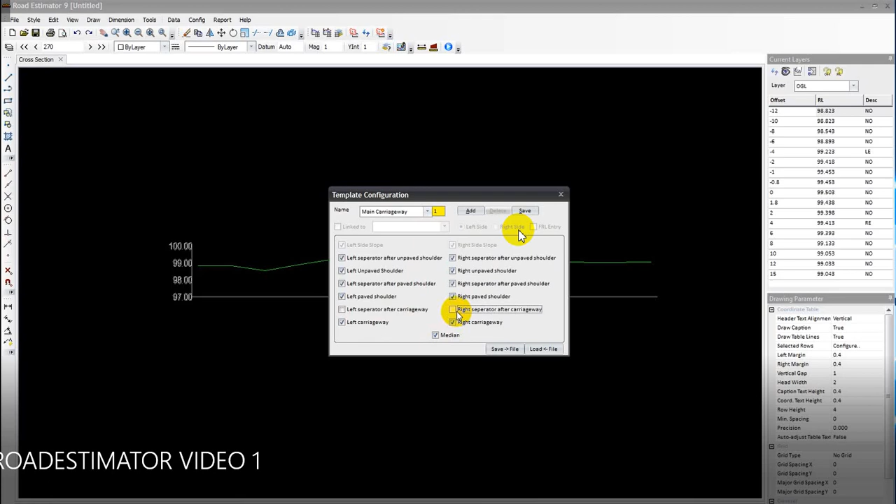So, welcome friends. So, in our previous video, we just learned about how to insert OGL and FRLs in our road estimator software. So, in this video, we are just going to talk about the template configuration. Okay, so basically, template configuration in the sense the kind of items we require in our template.

Like you can see clearly here the left separator after unpaved shoulder. Okay, so separator after unpaved shoulder. Similarly in right, so left unpaved shoulder if we require any, then right unpaved shoulder if we require. Basically in a highway figure, whatever we require we are just going to select that, and we are going to unselect the other options and now save it.

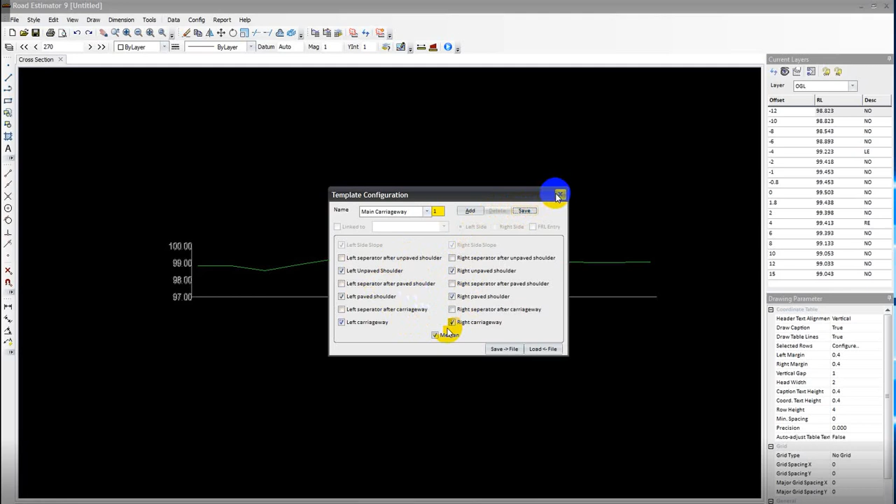So we are just going to cancel it. So we are just going to make a simple one with paved shoulder and side slopes. So here you can see the configuration option, and in data's drop down we can clearly see template, similarly in configuration also. So now in data here we can see the median. Okay, carriageway left side.

Here you can see carriageway details for LHS, similarly carriageway details for RHS, means left side, right side, similarly paved shoulder details for LHS, and similarly unpaved shoulder details for LHS, and similarly the side slope details. Okay, similarly in our right side also. So here we got the options.

So first of all we are going to elaborate the median. Okay, so first of all we require a chainage, so we need to assign a chainage there, and then the width of the median. Okay, similarly the left slope, you can see the percentage of slope which we are going to get by filling the median. So at what slope we do the median filling, we are going to provide. Similarly left kerb, in configuration you can see here we got the symbol option.

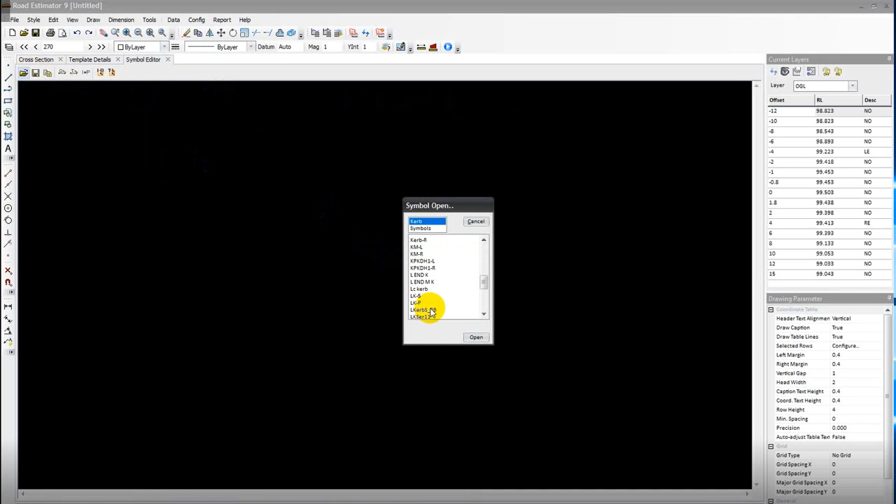Okay, so we have different symbols almost ready to use there. So here you can see I curb with the concrete option, L curbs. So we have ready-made symbols available, so we just need to select one of them to assign there.

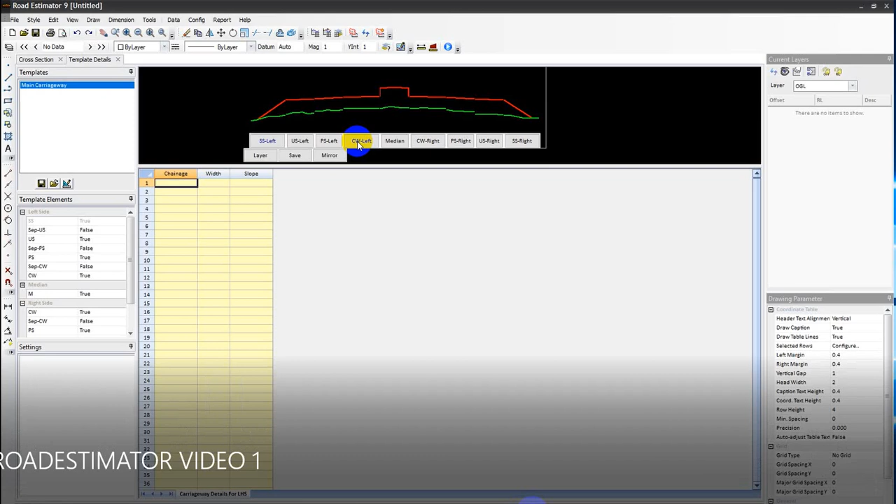One second. So road estimator just stopped working, so I'm going to start it again.

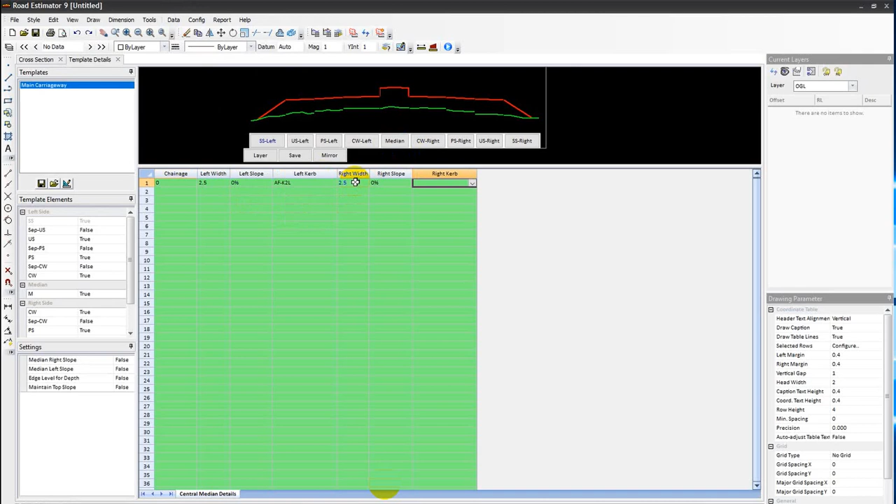Similarly here you can see, as previously we did, I'm just going to type the chainage, left width of the median and side slope, and now I'm just going to select the symbol. Okay, similarly the right width, and in the same way the right slope I'm just going to consider as 0, and for right I'm just selecting the right kerb. So now save it.

Carriageway details, so we can also paste the chainages and width of the carriageway with the slopes, camber. We can also call it a camber. So one thing which we need to consider while we are going to paste cambers in road estimator: whenever we are going to paste the left hand side's camber, we need to consider the opposite sign. Like, I'll show you some details of FRL and OGLs.

One second. Let me save it. Similarly, the carriageway details. Carriageway left, carriageway right. So I'm just going to mirror it. Yes. Now, this is a little bit slow. Yeah, yeah.

Let me show you some FRL and OGL formats which we basically need while we are going to run a template in road estimator. So here we got the FRL details. So in this way, chainage, easting, northing, elements, left and right. These are the cambers. Okay. So we need the opposite sign whenever we consider this in road estimator; for the left side we need to consider the opposite sign in the camber.

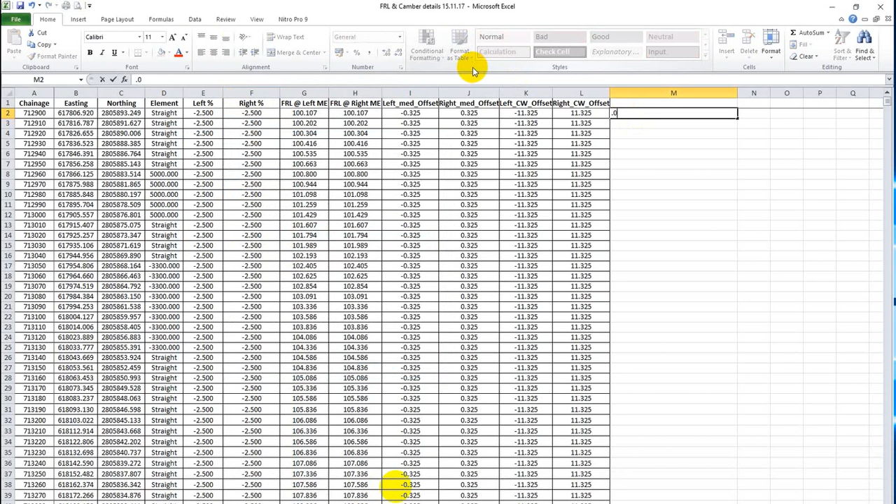So like, you can say it's minus 2.5% camber. So I am just going to format it into a percentage. So here we got 2.5%. Okay, so you can see clearly it's negative, but we need to paste it as a positive value. Okay, so this is the thing which we need to keep in mind while we are going to assign a slope in road estimator. Okay, so mirror it.

Now similarly we are going to assign the paved shoulders. Okay, so let me assume it 1.5 and the slope required is the same as the carriageway. So now unpaved shoulder. Okay, so let me assume it 2 meters, and its slope, it's an earthen shoulder we can say, so it's 3%.

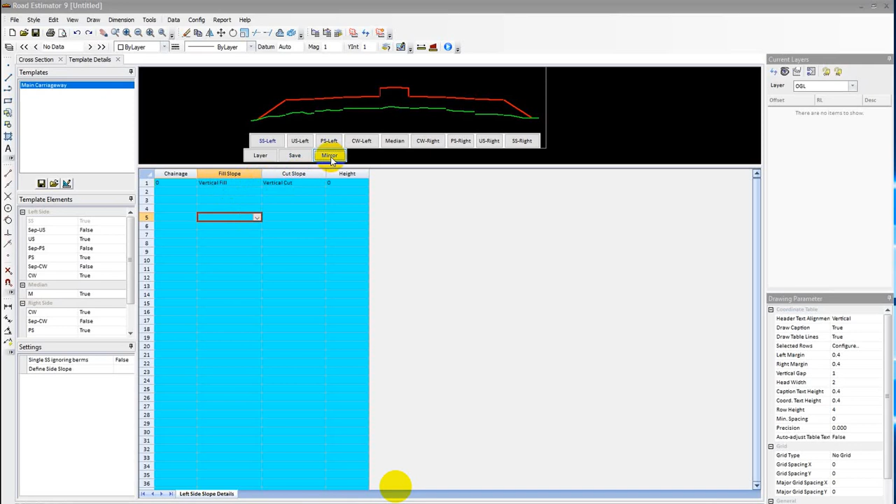Now here you can see in fill slope we are going to consider 1:2. In cut slope you can also take a vertical cut, like if it's rocky areas then we need to consider a vertical cut, but basically for a soil area we are going to consider 1:1. So now for the time being I'm just going to consider it vertical cut. Okay, now I'm just going to mirror it for the right side. Let's see. Now I'm just going to run process data.

Okay, so here you can see the templates. It's simply a template without crust details. For crust detail, we need to elaborate the crust before we run it. Okay, so that is enough for today's lecture. So in our next lecture, we are going to assign or configure the properties of crust.